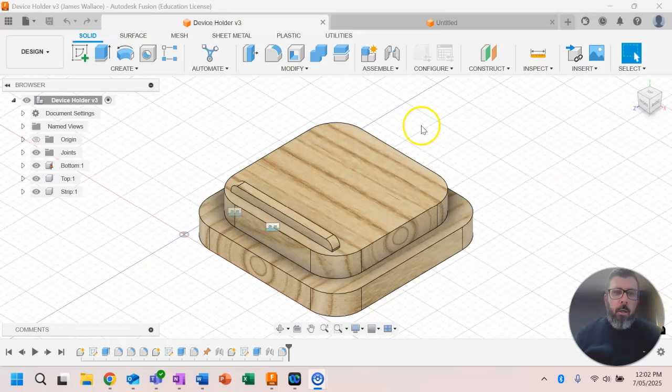Welcome to this tutorial where we're going to be teaching you the skills to make your device holder base in Fusion 360.

But the first thing we're going to need to do is make sure that we have our work saved in the correct spot. So what we're going to do, we're going to go to our blank document, and it should be an untitled or unsaved document at the moment. We come up to the top and we want to come to this file menu, drop that down, and go to save. It should open up this box here, and I want to click on this arrow to give us some more options. So if we drag that up, we should be able to create a new project here. So I'm going to click on that, and then we're going to call this the device holder and hit enter on the keyboard.

And then I'm going to select that one, and you see here that there's no files in there. And then we're just going to do practice. We're going to call this one practice. So once we've done that, I'm saving it in my device holder space, and we're calling this practice. So I'm going to hit save, and that should change the name of our project up the top here.

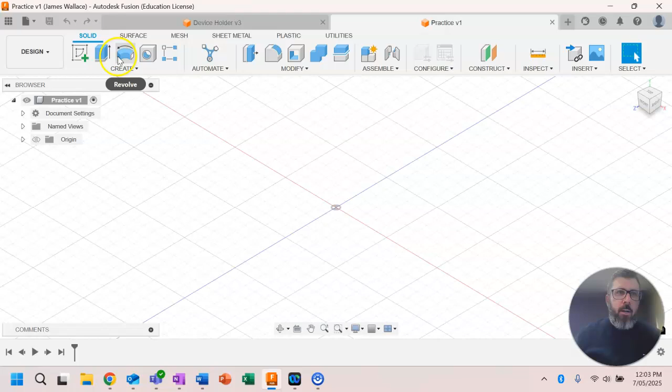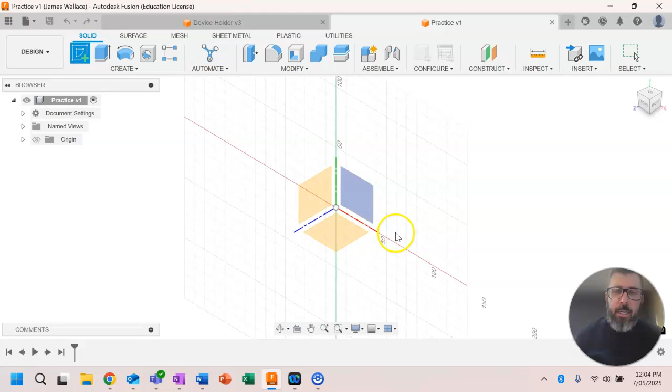First thing that we're going to need to do is we are going to create a new sketch. So we have our create section up here, and you can either drop down this menu or click here on create new sketch. So for this practice part, I'm just going to hit on the new sketch, and now we should have these three different views which we can work on. So these are called planes. And I'm just going to click on this one down the bottom. We're going to work in this bottom plane at the moment.

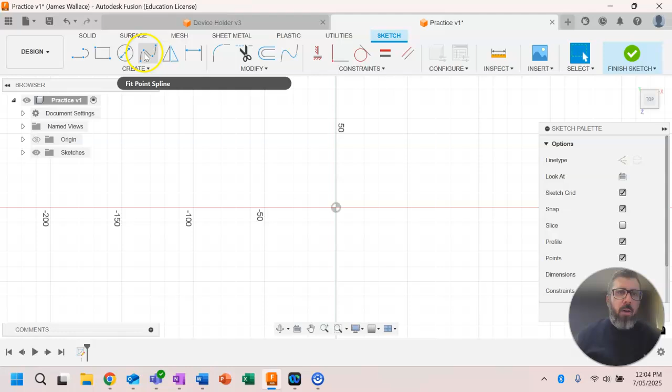Once we've entered the sketch area, we'll see that we have some different tools up the top here. So we have a line tool, a 2-point rectangle, circle, we have a curved line or fit point, and there is more in this drop-down menu. But the one we're going to need today is our 2-point rectangle. So I'm going to select that one. And we always start in our origin, and I click there, and I just want to drag that out.

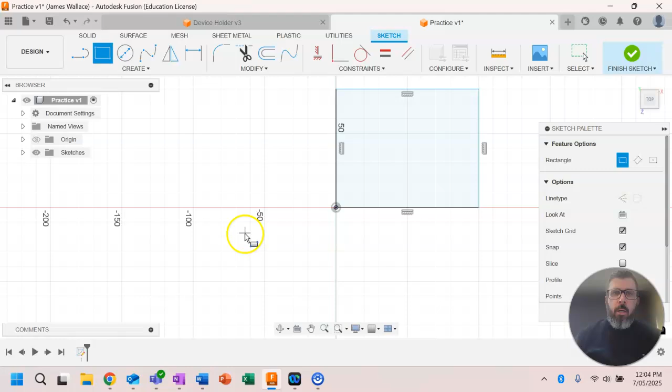So we're just going to create a square or a rectangle of any size at the moment. So that rectangle looks like that. We can hit escape on our keyboard to get out of our rectangle tool. Then we want to use this one. This is called our sketch dimension tool.

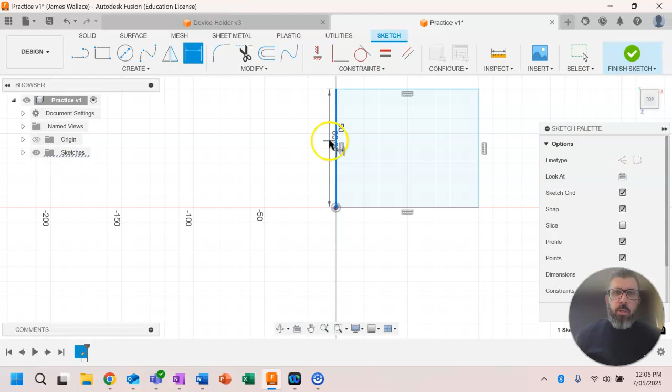So this is where we're going to add the correct measurements to that rectangle. So I'm going to right click on that one, and I'm going to select this left hand side. Once I click and drag that out, we can see that it is 80 mils long. So we want to make this one 120 mils. So I type 120, hit enter, and that should change the size there. And then I'm going to do the same on the bottom. So click, drag down, and then I have my next one, so 120 by 120. So we've created a square that is 120 by 120.

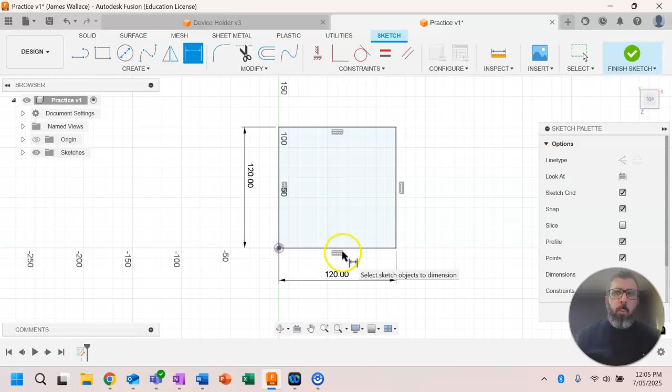We're going to come up to the top here, and I'm going to click on Finish Sketch. And we have our view section up here in the top right. So at the moment, I've got the top view. If I hit this little house, it takes me to my home view, which will give me a bit of a three-dimensional look at it.

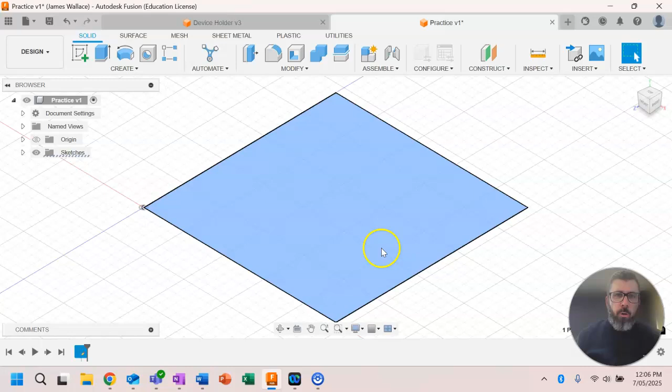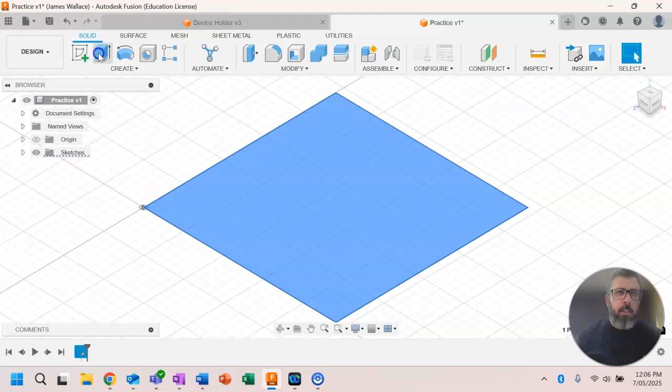So at the moment, this is a 2D shape, but we want to make it a three-dimensional shape. So I'm going to click on the square that we've made. We come up here to our create section again. The one next to the create sketch is called extrude. So extrude is where we add a third dimension, so we give it a 3D look. You can either click on that, or you can also hit E on your keyboard. So I'm going to click on that extrude button, and you should be able to see this arrow here, and this window should pop up out the side.

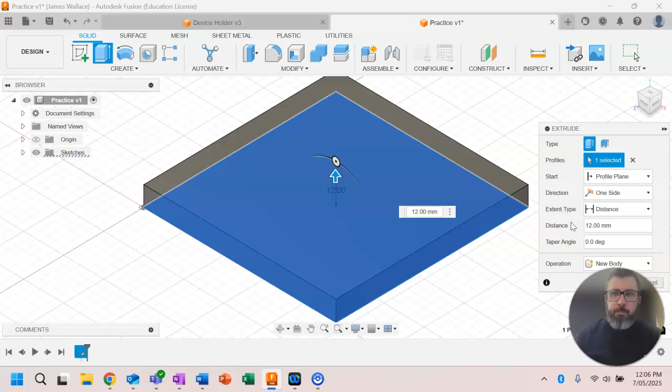So for this case, we're going to create a new body, and we want to come up 12 millimeters. So I'm going to hit 12 millimeters here, or you can also drag this arrow as well to get to it. But we want it at 12. So I'm going to type 12 there and hit enter. So we can see that we have created a three-dimensional square.

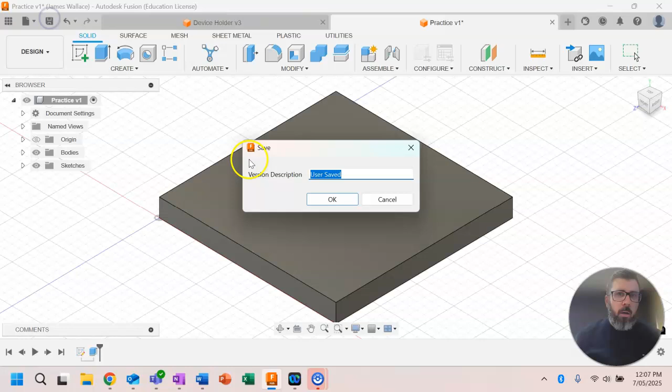And we're just going to make sure that we hit the save button. This little save button up the top here, I'm going to click that. User saved, hit OK. So now we're not going to lose any of our work.

So check back on the next video on how to change the color, and also we're going to curve the corners.